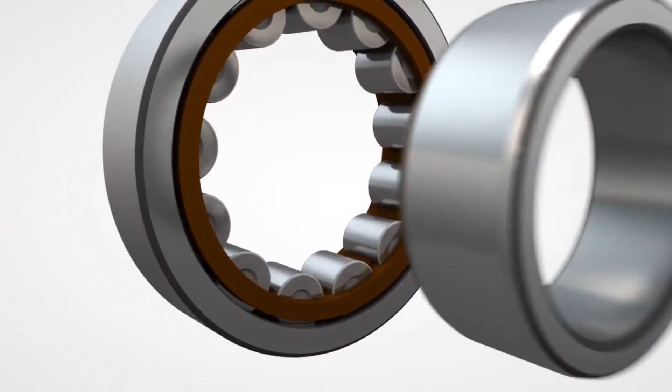The most common cylindrical roller bearing consists of a flanged outer ring, a separating cage, and a number of rollers. The floating inner ring completes the bearing. This type of bearing is designed for accommodating high radial loads at high speeds. This bearing is always used in conjunction with an axially locating bearing to ensure the shaft is properly supported.

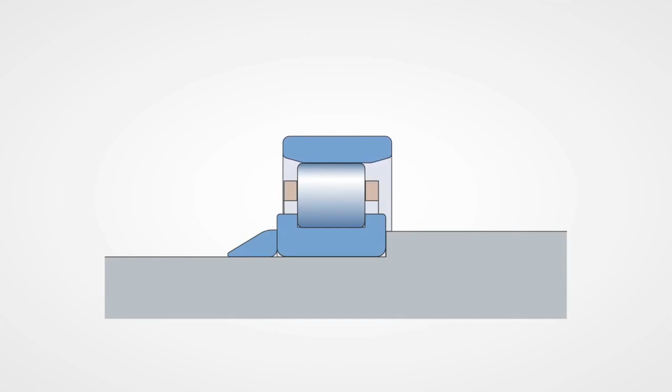Single-row cylindrical roller bearings are made in a number of variations. They can have a floating outer ring, or the most common, a floating inner ring type. This design can be supplied with a number of axially locating variations. This film will concentrate on the floating inner ring type.

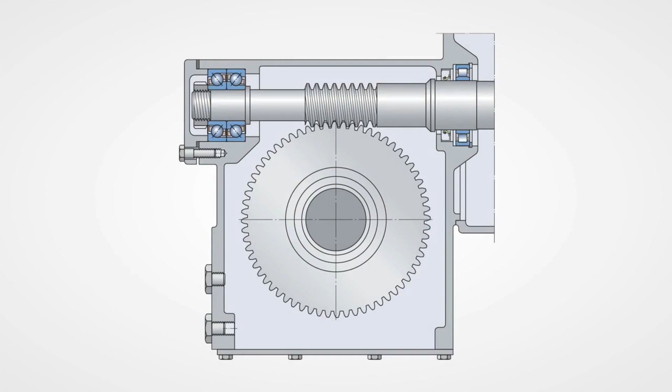The most common applications for the cylindrical roller bearing are electric motor applications, gearboxes, and many other large applications, like rolling mills for aluminium foil. These bearings can have up to 4 sets of rollers per bearing, giving very high radial load capacity and stiffness, but an axially locating bearing is required. Some foil is rolled to less than 1/100th of a millimeter thick, which demands extreme accuracy from the bearings.

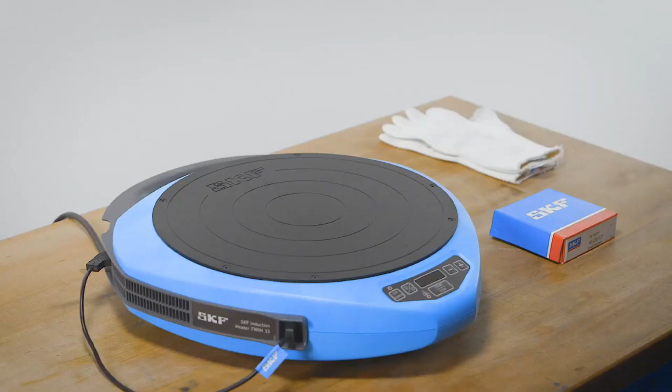Cylindrical roller bearings are often fitted using heat to expand the bearing inner ring. SKF provides a wide range of bearing induction heaters for this purpose. In this instance, a small induction heater is used.

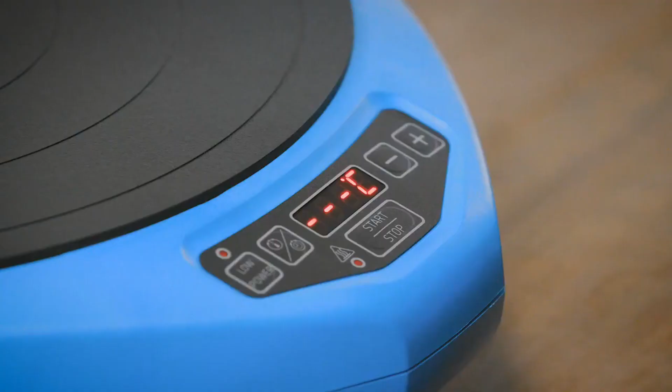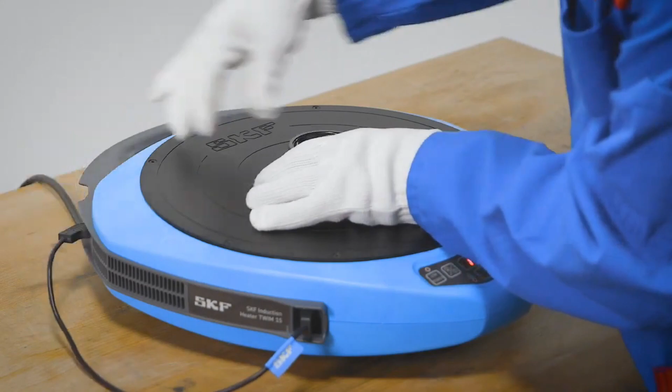When using heat, do not heat the bearing above 110 degrees centigrade and always use protective gloves. Hold the inner ring against the shaft shoulder until the ring cools and grips the shaft.

The second part of the process of mounting the bearing is fitting the outer ring assembly onto the shaft.

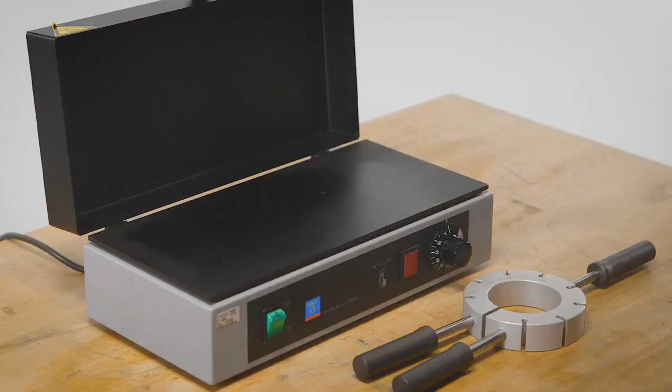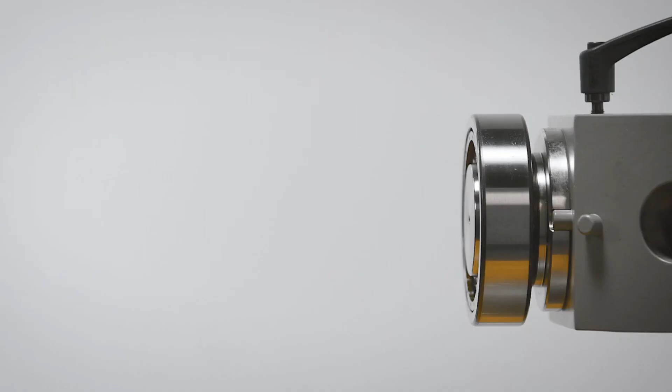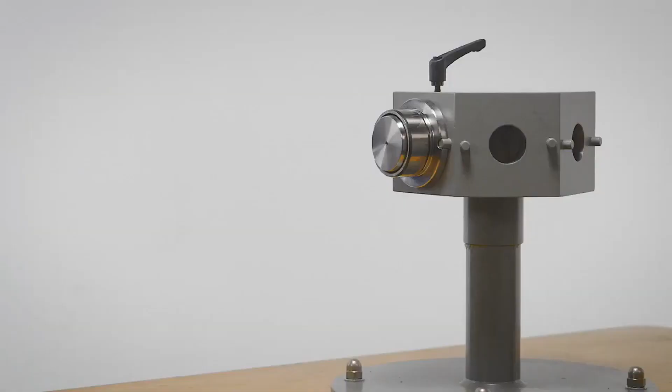Small cylindrical roller bearings can be removed by heating a special aluminium clamping ring, using a hot plate to around 280 degrees centigrade. Damage-free removal of the tight-fitted inner ring can be achieved. The transfer of the heat with the aluminium ring expands the bearing inner ring, so ensuring a simple removal without damaging the shaft. On the medium and large inner rings, an SKF EAZ type induction heater can be used for

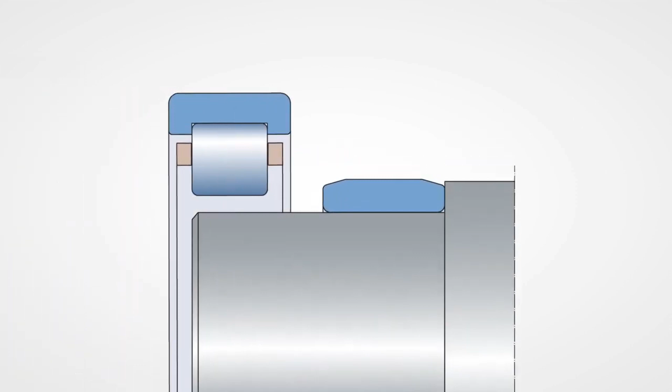both mounting and dismounting. Make sure not to damage the inner ring during the mounting process. A damaged inner ring will reduce the bearing life. To avoid damage, use an inner ring guide sleeve.